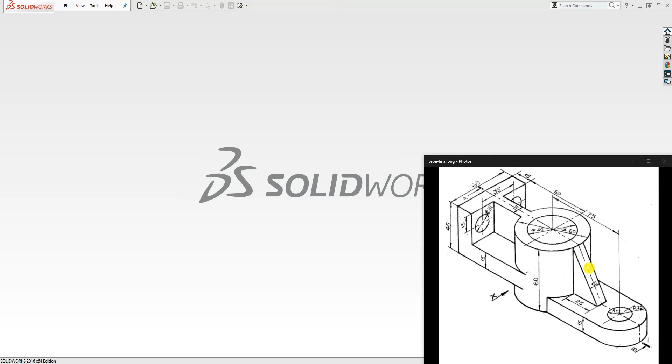To start, click a new part file. I'm going to change my units to metric and click OK. On the top face, I'm going to start by drawing this cylinder.

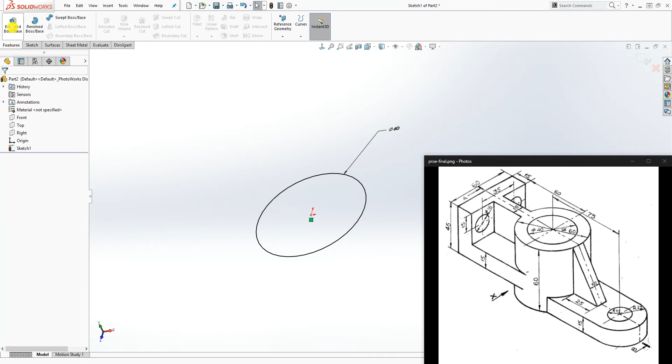Sketch, bring it over here and draw your circle, dimension 60, and extrude it down 60.

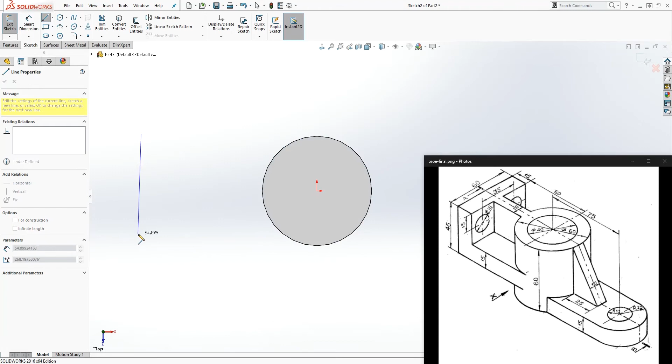Now on the top face, let's go to isometric view. Draw a sketch, normal to, and move this here. I'm just going to draw a line here, make sure this line is vertical, and from this line to this line, add a mid-plane constraint. Make this line's dimension 60.

Make this line a center line, and offset this line using the bi-directional offset, with a distance of 10 because of the offset we're doing. This is going to be 5, because if you put 10 in there it will offset 10 in both directions, so use 5.

Click OK. Now you have 5 in both directions. I'm just going to close this off right here and draw another line, something like a box over here.

I'm going to add a dimension here, which is 15. We also need this dimension, 60, from here to the center line.

Trim off all the extra lines you don't need. So we have this feature - go back to your feature and extrude it down 45, then click OK.

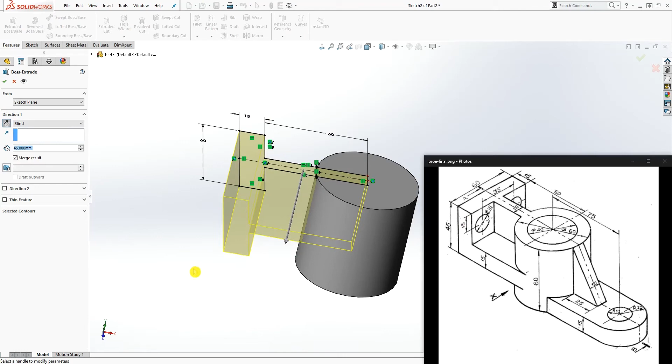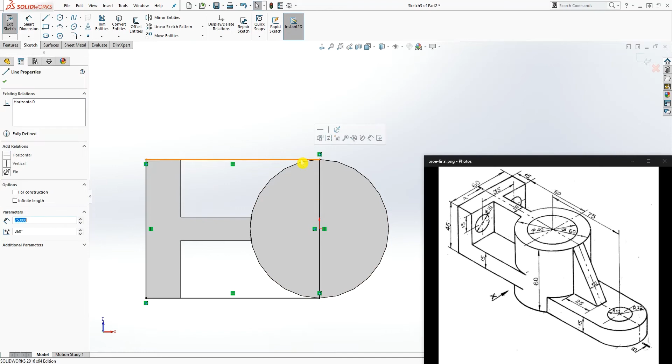Now click on this bottom face, sketch, normal to, and draw a box, something like this, coincident with all 4 corners. You can also click this line and this edge and add a tangent constraint - it doesn't really matter, but just make sure this line is tangent to this circle.

Once you have that, go to feature, extrude, and extrude it up 15, then click OK.

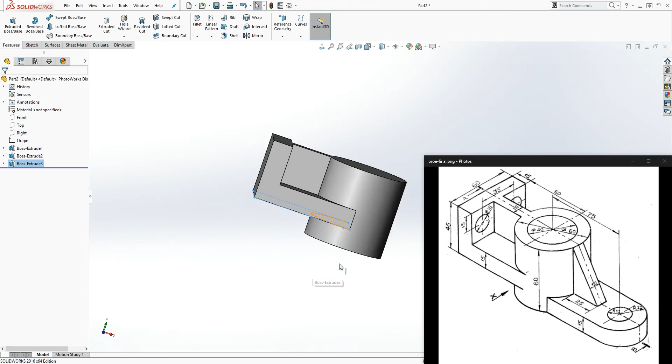Now we are going to draw this feature. Sketch on this bottom surface, normal to, and use the slot tool, drawing a line coming up there and something coming out like this.

Make sure this line is horizontal, put it on the origin point so it's coincident, and from here to here is 75 - from this point to the center line. The radius is 32.

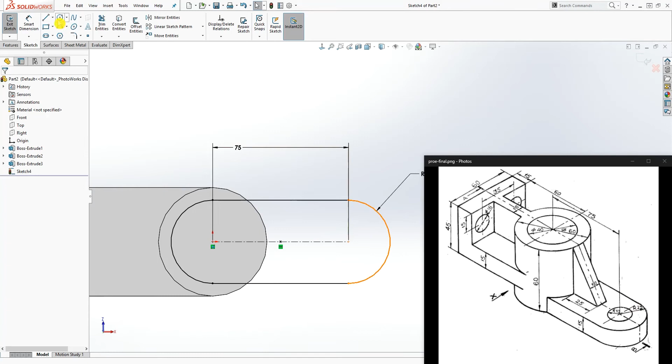That's fully defined, so we add this circle which is giving the radius - it says radius 10, so we add the diameter, which is 20. That's fully defined, and we extrude it up, change direction, also 15, click OK.

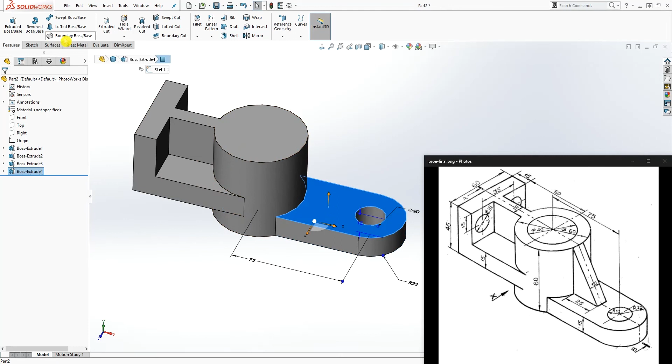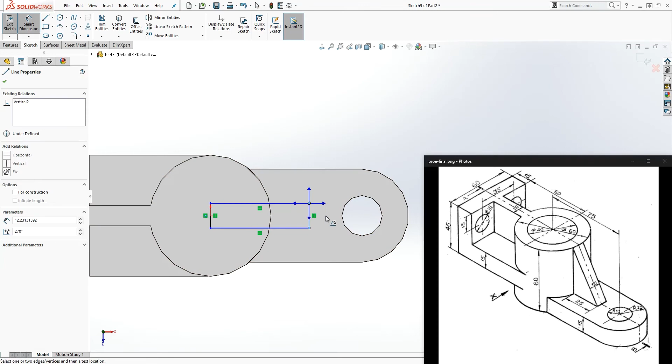Next we click this face, sketch, normal to, draw another rectangle coming like this, and this point and that point on the midpoint of that line, then move this out. This dimension is going to be 10, and the distance for now let's just do...

58. I'll show you why I'm doing it this way - if you draw that feature on this plane and extrude it, it wouldn't be right because there would be some stuff sticking out. So you have to do it this way.

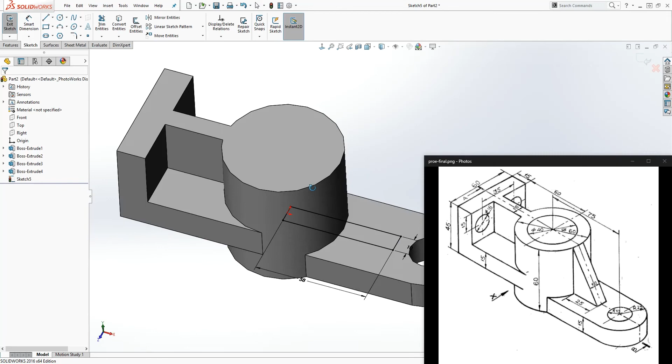Once this is done, go to feature, extrude, change to up to surface, click that surface over here, and click OK. Now we have that feature.

All we need to do is cut the angle in it. If you look over here, the 25 is actually from the point where this rectangle meets that, so that's what we're going to do - this top part will be kind of flat over here.

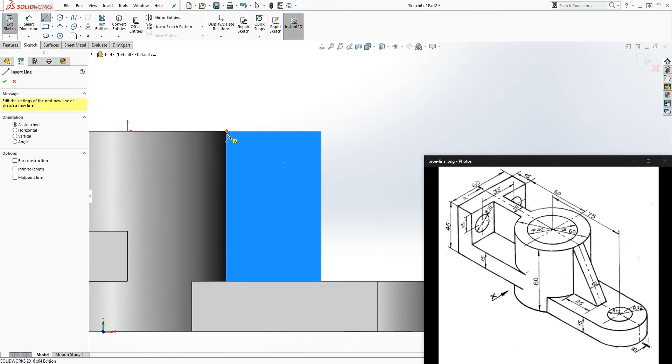Click this face, sketch, draw a line coincident with that point, and something coming down like that - from here to this line is 25.

Now draw a line, something coming down - it needs to be vertical - something coming down, right here, and move this to this point to make it coincident.

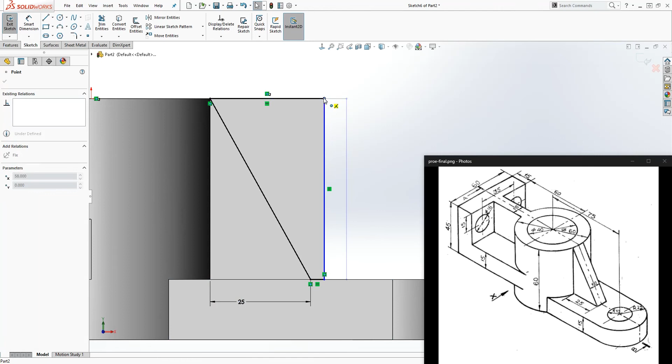I'm just going to do feature, extrude cut - not through all, up to next - and click OK. That's how you get that feature over there, and this part won't stick out when you extrude it.

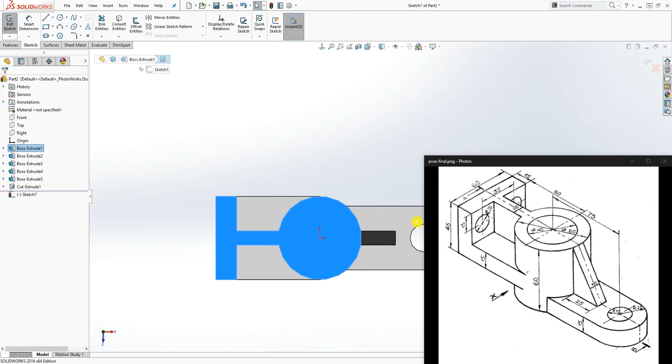The next two things we need to do: cut this whole sketch, normal to, draw my circle which is 40, then feature, extrude cut, up to next, and click OK.

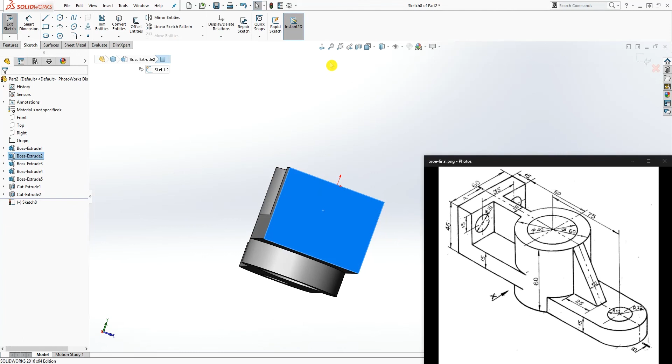On this back face, sketch, normal to, draw a line from this origin point coming down, and draw another line coming this way. Make this line and this point have a midpoint constraint, and add the 2 circles to this line, something like this.

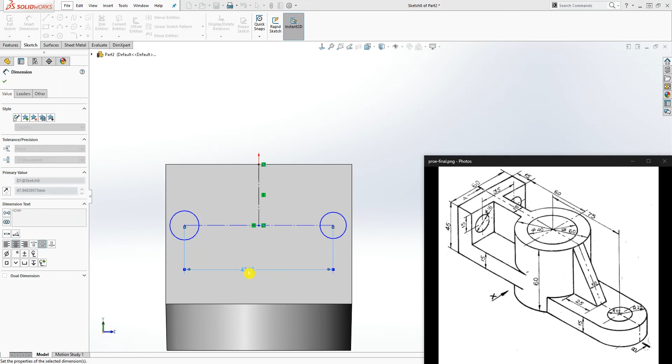Make this line a construction line - the dimension for this line is 35, and the dimension for the center line, that circle to that edge, is 15.

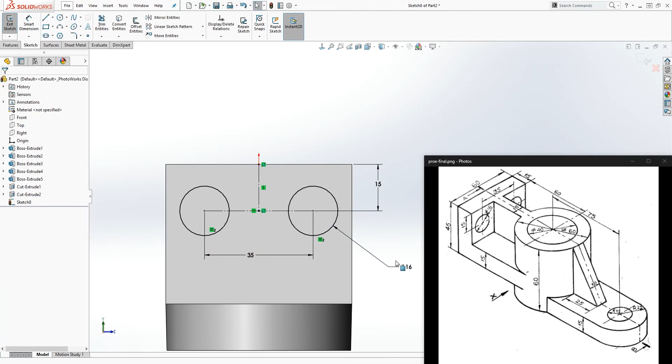Click these 2 circles and make them equal to each other, add a dimension to this circle which is going to be 16, right here. Now go to feature, extrude cut, up to next, and click OK.

And there you go - that's how you make this part.